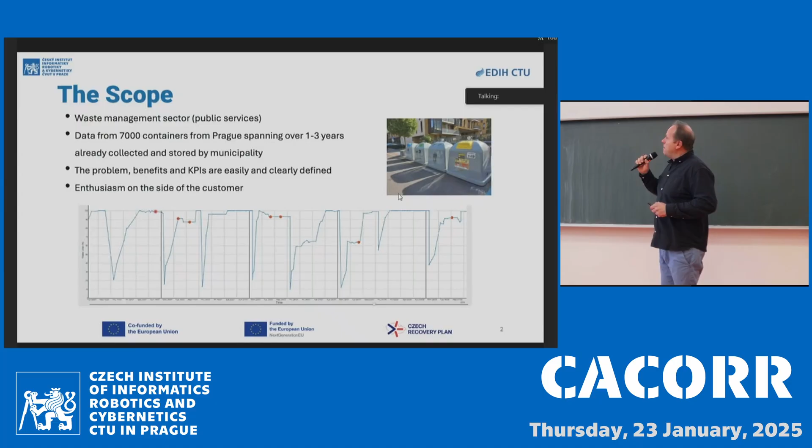The main objective is to make the waste collection more efficient. But to do that and to perform good decisions based on data, we need good data.

So in the middle, you can see data interpretation and cleaning. We have to make data more trustworthy and more correct, and interpret it to find different mistakes and errors. This is probably the most important part of the whole current project.

Here you can see what we can detect, what can be the problem. Here is the simplest case - detection of waste collections, which you can imagine is simple. But there is one false positive point, which is caused by an error of the sensor. And those errors are normal, it's not something very rare.

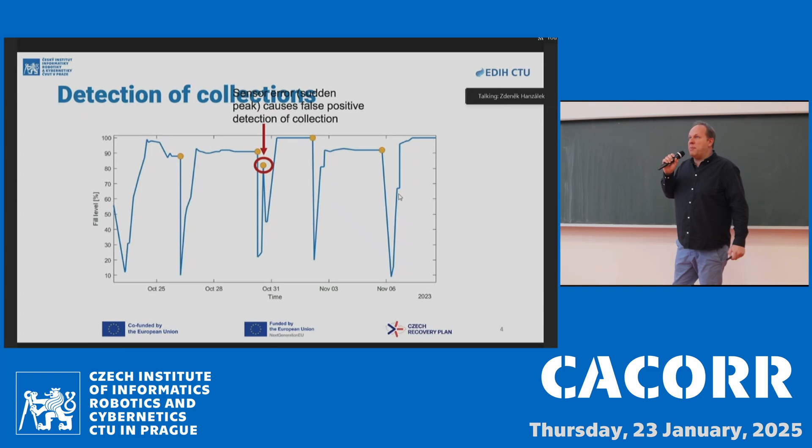This can lead to problematic decisions, like deciding there was an extra collection of the container, which is not true here. This is just one example, but there are many such examples and I don't have time for them.

Okay, here are some other things that we need to detect, and we are using heuristics, we are using also pattern classification, supervised learning. On the left side you can see, for example, stuck entry of the container, which can be a problem for citizens.

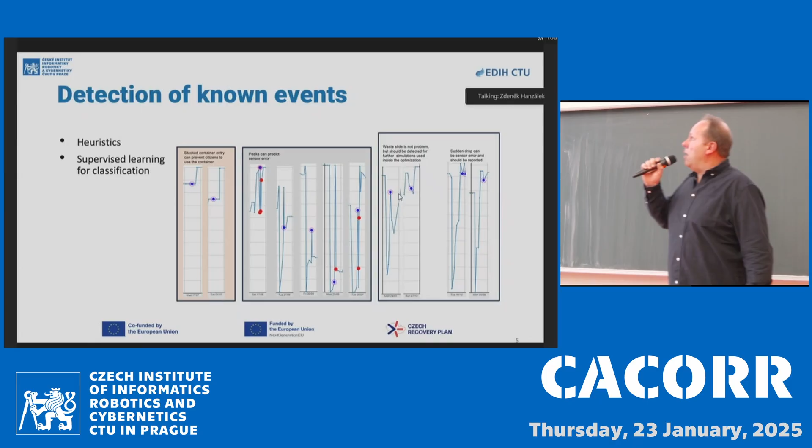In the middle you can see different peaks caused by error of the sensor. On the right hand side you can see a waste slide, which is normal, but we must differentiate it from sudden drop down, which are errors of sensors.

So those are just little examples of many things that we have to detect, and behind those, or except of those, we also need to detect some other abnormalities. So we are performing also anomaly detections.

Here is a very simple example from a method well known from industry, Six Sigma anomaly detection, where we have a mean weekly profile, and we have some standard deviations, and we define a range of plus minus 3 sigma, 3 standard deviations.

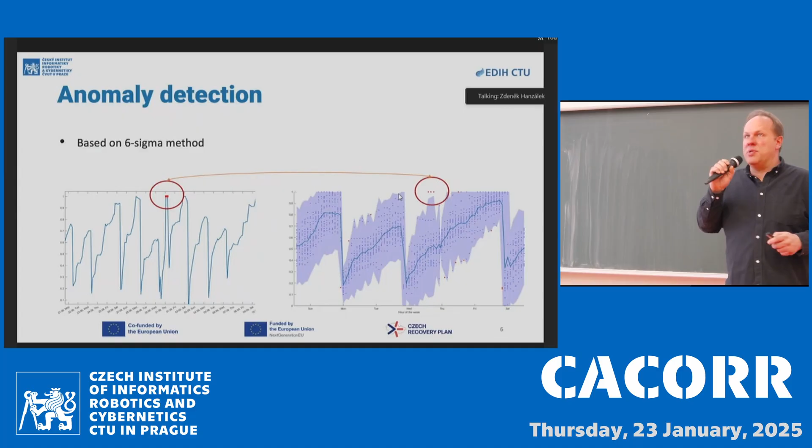And if some point exceeds this range, then it can be anomaly. Here is probably an anomaly caused by the first school day, but we also tried to test different other methods.

The best performing method at this moment is based on an autoregressive model with exogenous variables, where the exogenous variable is the collection signal, a binary signal, where we threshold the error of the forecast of this model, but we also use autoencoders and threshold the reconstruction error of that.

And we apply and test many of those things to choose one of those for further integration into a Golemio system, which is the Prague platform.

Okay, here you can see how we are trying to simulate what will happen if we change the schedule of collections. This is very simplified, by the way, but we have the clean signal at the beginning.

We can compute its difference, and then we can remove the collections, and then this represents the deposit of the waste in every hour, and we can use it by cumulative sum together with the new collection schedule.

We can use it to simulate the new schedule, the new fill level behavior, and we can use it in an optimization loop to optimize some criteria.

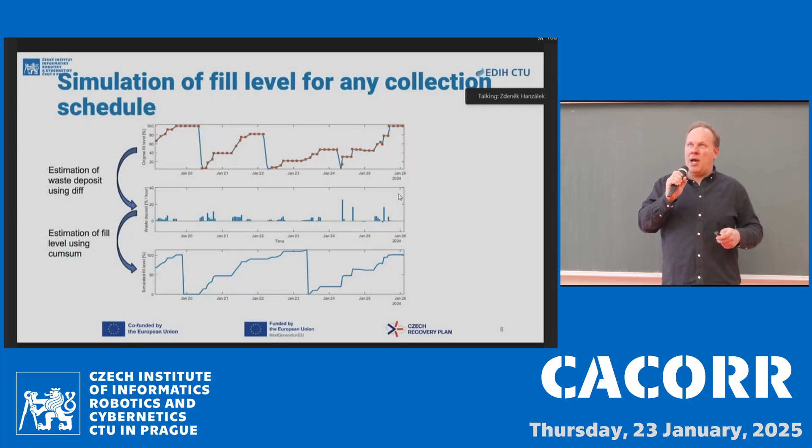An example is here. You can see that we can also simulate how much of the waste will not be deposited into the container because the container is full. It's the green part where we can measure the missed capacity and overflow.

And we can also measure how often and how much the container was collected without being full, which means that we underuse its capacity and we waste fuel for collections, or CO2 and so on.

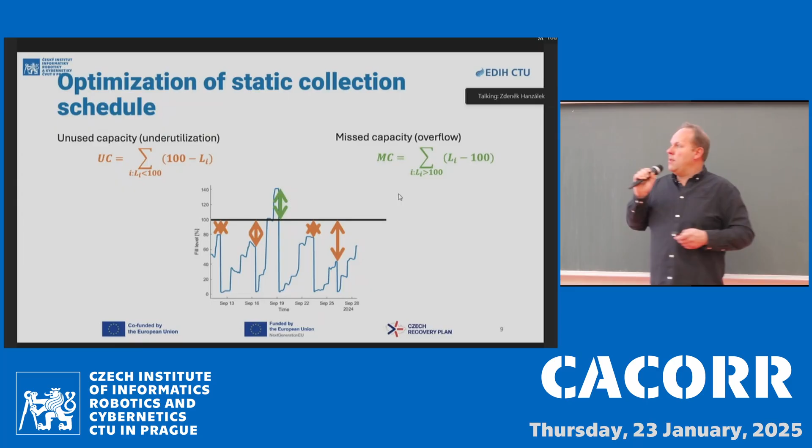Both those criteria are in trade-off, but both have some ecological gains. It means on the left side we save fuel and reduce CO2. On the right hand side we reduce the pollution of the neighborhood of the containers, for example.

We have some KPIs which I will not go into the details, but first are the data cleaning KPIs, where we are able to automatically analyze the signals instead of manual analysis by expert.

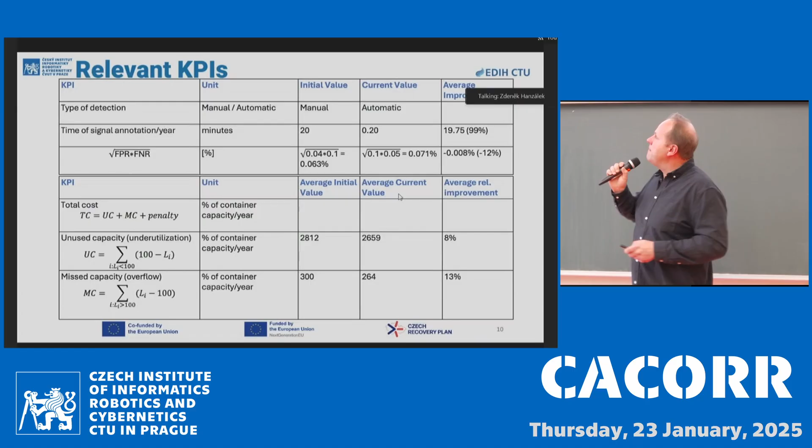There are also optimization KPIs where we are able at this moment to reduce those criteria by 10%. This is measured on 100 containers, and there are many other benefits which you should see here.

Also, for example, I must point out the networking, because it enables better communication between the municipality and the other stakeholders like citizens, but also a collection company or sensor providers.

And we had to develop an application which will not be used finally, but it's used for enabling communication and getting feedback from the customer, which can give us feedback about the methods, but also user experience, but also we can use it for...

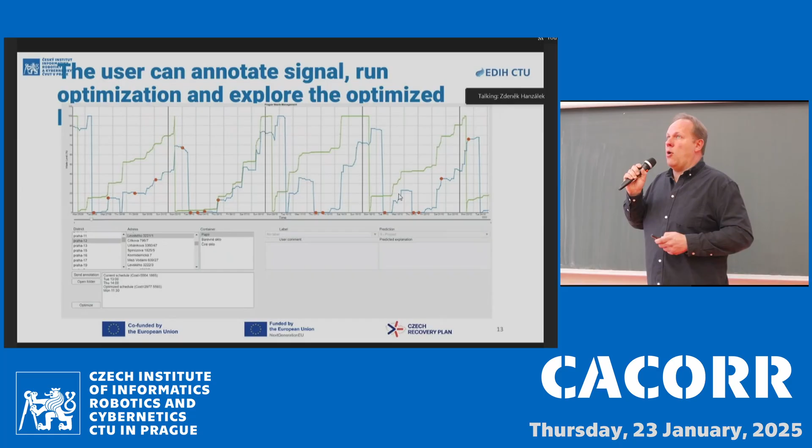Evaluating the methods in terms of comparison of our predictions to what really happened, the real annotations. And those are examples. The user can optimize methods, can go through the signal, can optimize the schedule of collection, can annotate data, and can observe the automated annotations.

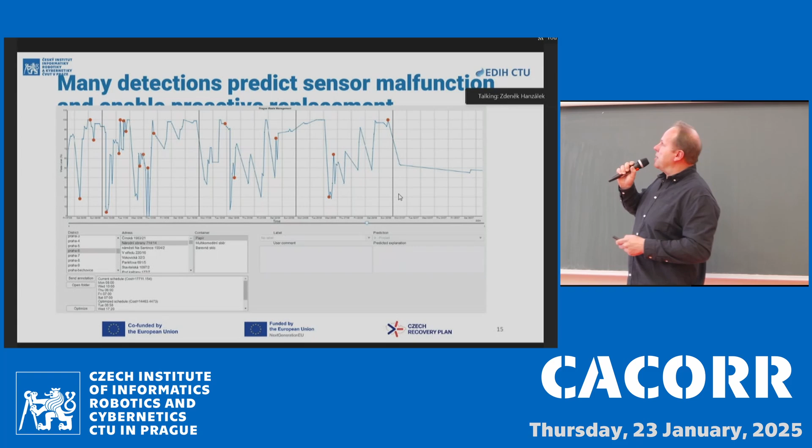So, okay, hello everyone. It's my pleasure to introduce or give you an overview about our project, contractual research with Škoda Auto company, and the project was about the weights of the special car equipment.

So, first, some background to understand the entities from the next slides. Most of us have a car, and most of them, for example, me as well, have a car from the Volkswagen concern, and maybe you can find in your car, in a service book or on the tank cover, you can find the car specification.

It is composed of approximately 200 families of PR numbers. PR number represents production order number, production or product specification, or part specification. For example, GOC represents a 5-speed manual transmission.

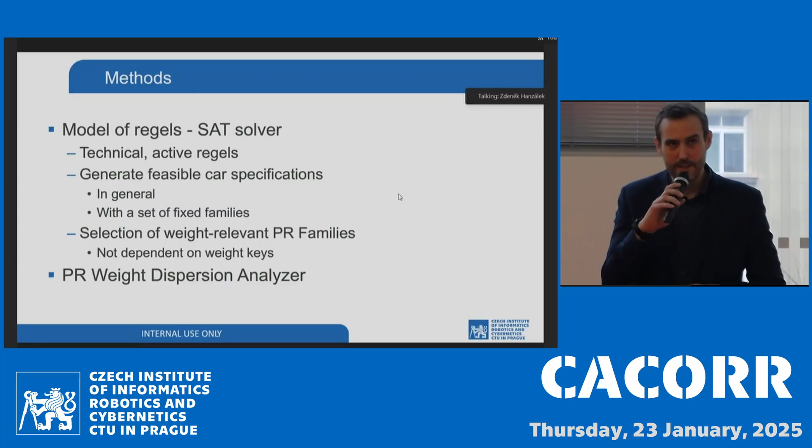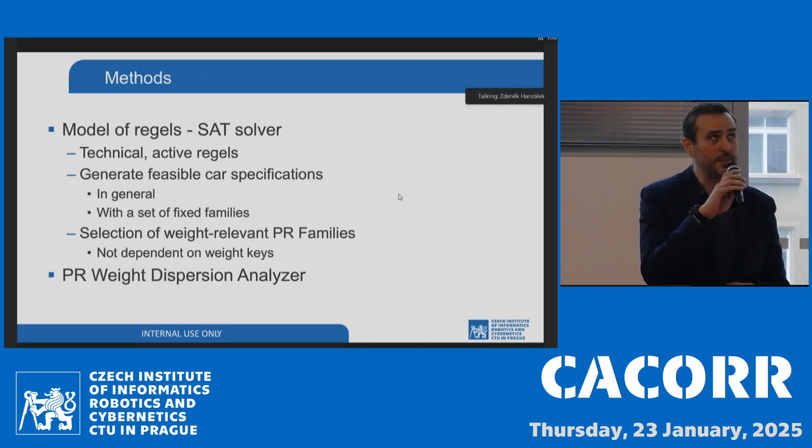Active rules—like if you have a car produced for Sweden, you have to have a battery with a bigger capacity, etc. For one car, there are around 12,000 rules which specify or limit the given production, and we use a SAT solver to generate feasible car specifications and also select what they call in Škoda Auto weight-relevant PR families.

I've already mentioned that the car is specified by the weight key, and with the help of the rules, for example 40 to 80 other families are dependent on the weight key, and the rest is what's important for this project, or as input for us.

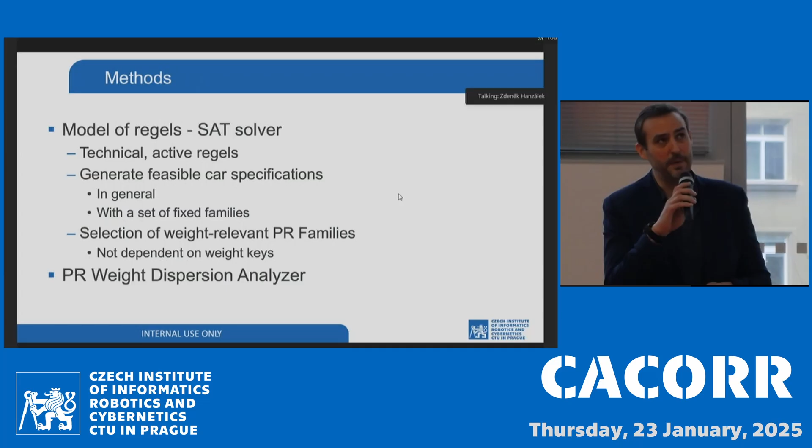Next, we implemented something we call the weight dispersion analyzer, and I'll give you an overview of the main steps. First, we generate a set of PR numbers from weight-relevant families.

Next, we prune the solution space using a database—bill of material database in English, I hope. And next, we investigate these pairs from a family to get a weight contribution.

The next step is to generate identical feasible combinations of PR numbers—the car specification for the pairs from the previous step. The outcome becomes better with an increasing number of such car specification pairs for the pair of PR numbers.

Next, we compute the weight of the overall car, and then the weight difference between these two cars with the same specification but just a difference in the given pair of PR numbers.

We have the weight contribution, and in this step we generate 10,000 such pairs of car specifications for every pair, and at the end you can see the dispersion of the weight contribution, which is shown here in the figure.

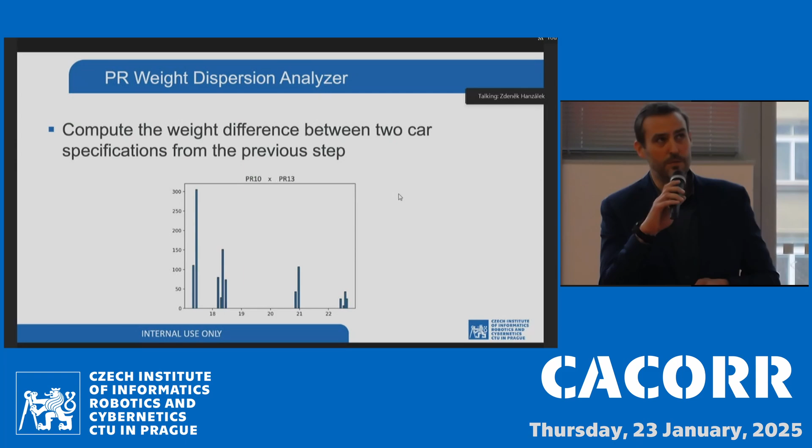There are some limitations: if the dispersion is bigger than some threshold, you have to specify or improve the dispersion using an additional PR number from a different family. In this step, we go through all of the other families to find the suitable one which provides the smallest dispersion.

To conclude, the solution was not limited just by the target, but also by the processes in the companies and the systems and software which are available.

This means the outcome was, for example, an Excel sheet with a specific number of lines showing the most important contributions of PR numbers, because this contribution of PR numbers is manually added to another system, etc.

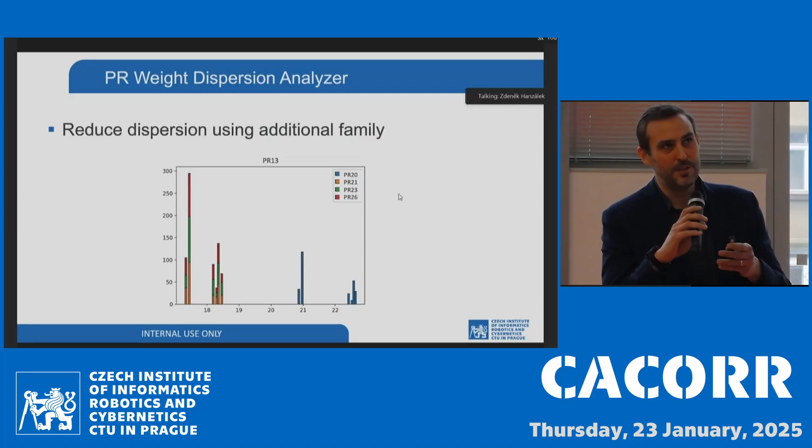I would like to present my first publication at the IEEE INDIN conference last year. The title of my publication is Product Digital Twin Supporting End-of-Life Phase of Electric Vehicle Batteries Utilizing Product Process Resource Asset Network.

The motivation of our work is something we encountered ourselves when we wanted to create a disassembly process for EV batteries. The problem is lack of support from manufacturers for end-of-life processes.

To address this problem, we proposed a product digital twin, which for us is a digital replica of a physical product—in our use case, an EV battery. This digital twin accompanies the product from initial design to recycling or reuse, offering insight for each product based on its condition and usage history. So this digital twin offers lifecycle management for a product.

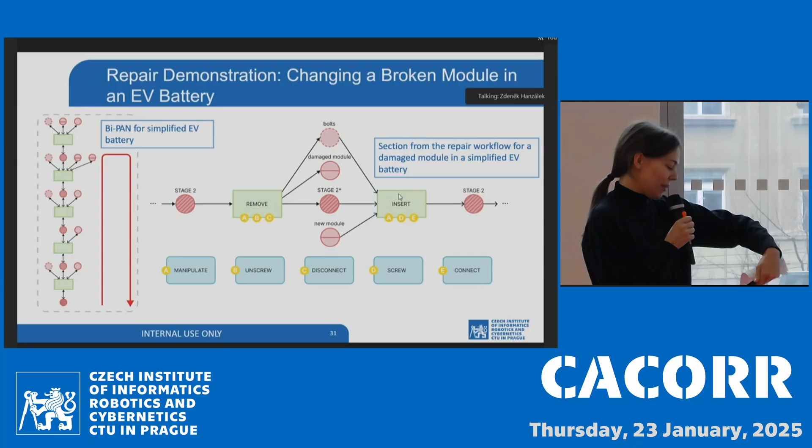To sum up, the Bi-PAN-based digital twin for products provides efficient planning for several operations during the whole life cycle of a product. Thank you.

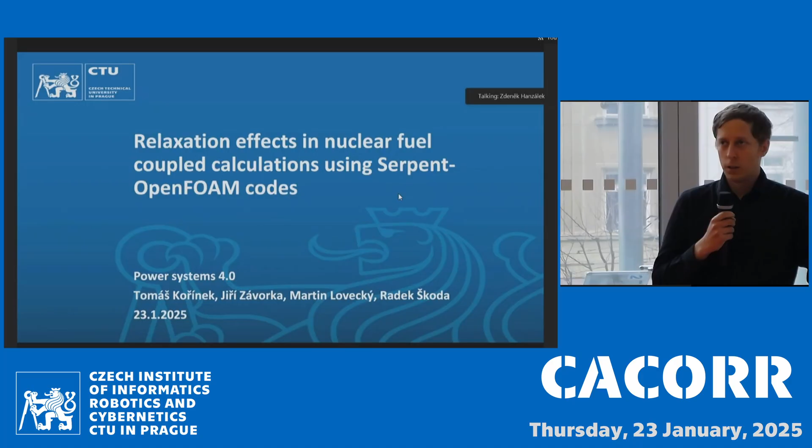Hello everybody, my name is Kořínek, and I'm from the group of Professor Škoda. I'm going to present one of the results of our research, which was focused on multiphysics problems in nuclear reactors.

This is something we are doing under a project within the National Center of Competence—the Center for Advanced Nuclear Technologies. We have a sub-project focusing on high-fidelity simulations using coupled codes, which we use for validation of macro codes, where macro codes are nowadays used for safety analysis of nuclear reactors.

This work was published in one of the top journals, Progress in Nuclear Energy, which I call a swing journal because sometimes it's D1, sometimes Q1—nobody knows—but it's one of the best we can publish there.

In this case, we did some multiphysics work, meaning we coupled two problems: neutronic physics with thermal hydraulics. There are several reasons you need to couple them, because there are feedbacks or strong interactions between each other.

So what does it mean? Basically, what is going on with fission and nuclear physics is influenced by the results we obtain from the thermohydraulics. This means fission is influenced by temperature, density of the coolant, fuel, and so on. Because of this strong feedback, you can encounter problems with stability of the calculations.

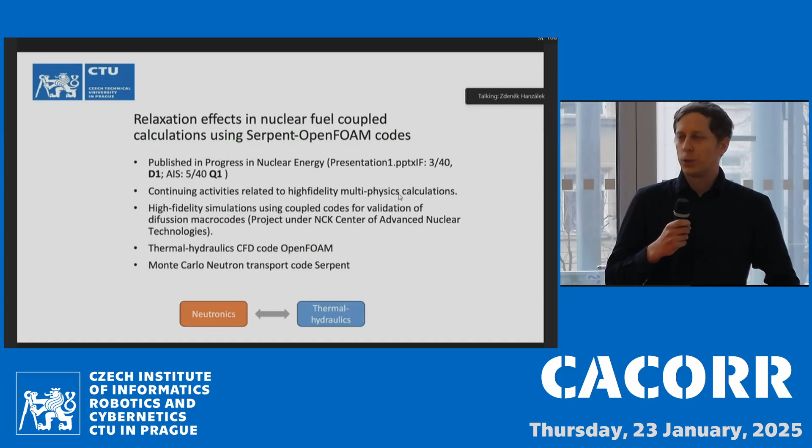That's why we focused on relaxations of those calculations and examined the influence on computational cost and accuracy of the simulations. So why do we care about focusing on computational cost and accuracy?

For example, in a nuclear reactor core, if we speak about the reactor we have in Dukovany, you have more than 300 fuel assemblies. Each fuel assembly contains 126 fuel rods, and fuel rods are composed of a fuel pellet and cladding, which encapsulates the fuel, surrounded by the coolant. So it means that in the reactor you have something around 40,000 fuel rods you have to calculate. For Monte Carlo simulations, you need a lot of particles to simulate it, especially with 40,000 fuel rods.

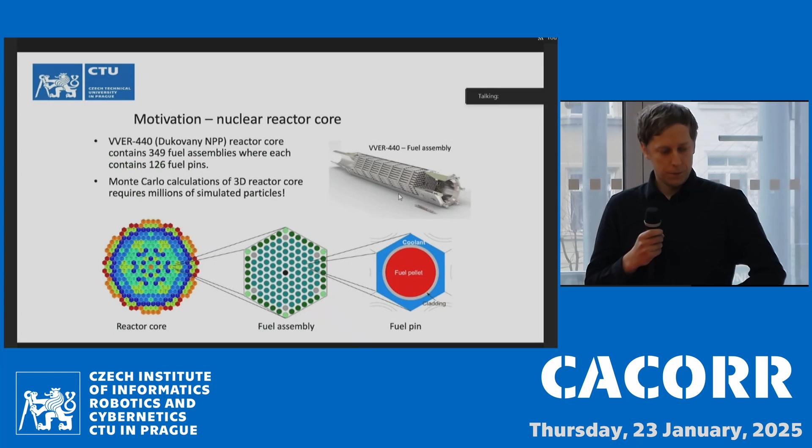So in our case, we took a look at a simple problem. We took one of the fuel rods, which was surrounded by the coolant, and we performed coupled calculations using the high fidelity code. For thermohydraulics it was CFD, and for the neutronics part it was Monte Carlo.

And we took a look at the relaxation. As I said, there are a lot of strong feedbacks. So when you start without any relaxation, you basically never converge because there will be oscillations in the solutions. So in this case we focused on methods of relaxation. There are different methods: using a constant relaxation factor, a factor which changes during the iterations, and also an additional change when we increase the number of simulated particles, basically to save computational time.

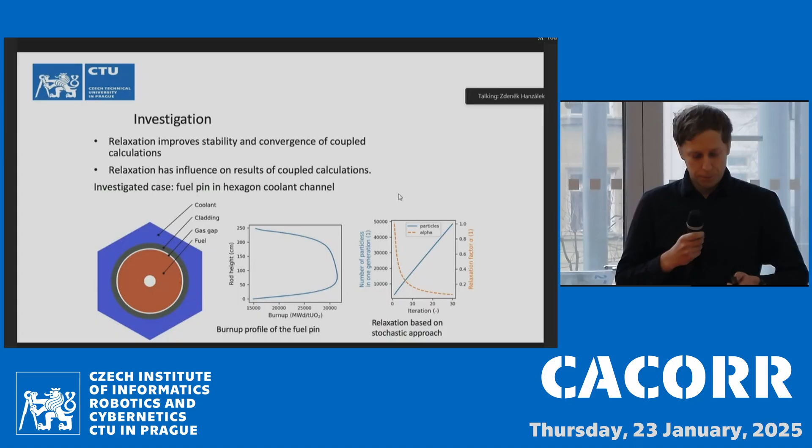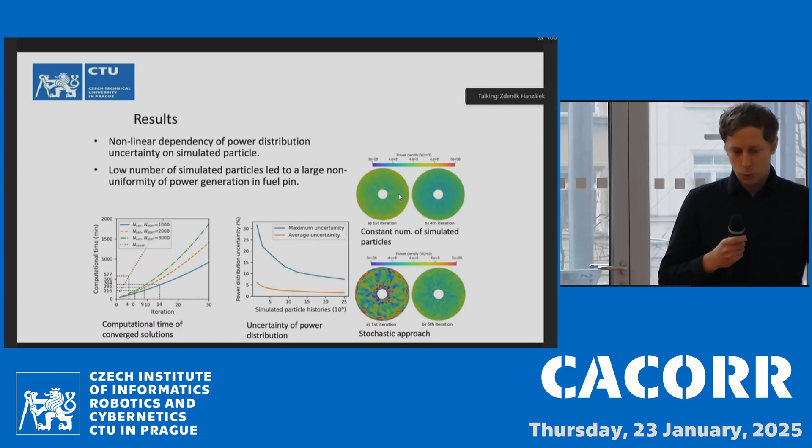So that's all from my side. Thank you. Thank you.

My name is Mamula. I'm head of the energy group under Professor Mařík. And I will present you a success - we call it a success story - of research and development in our department.

Last year on this spot, I presented that we had developed an algorithm which would be implemented in a real application. Since then, the time passed through the winter, early summer, into the summer, and then maybe in June or July, you might have read some articles about the go-live of the power plant, with several official starts and conferences presenting that the investor achieved this goal, and the power plant was put into operation.

What was the timeline of the project? We met with the investors approximately in 2019 and started to think about their concept. We provided them with the initial feasibility study.

We provided insight on whether one big engine or more small engines were feasible for their idea of provision of ancillary services, and we finally came to the solution of 6 small engines and a battery system, which seemed ideal. Then there was an unpaid time while the idea was growing.

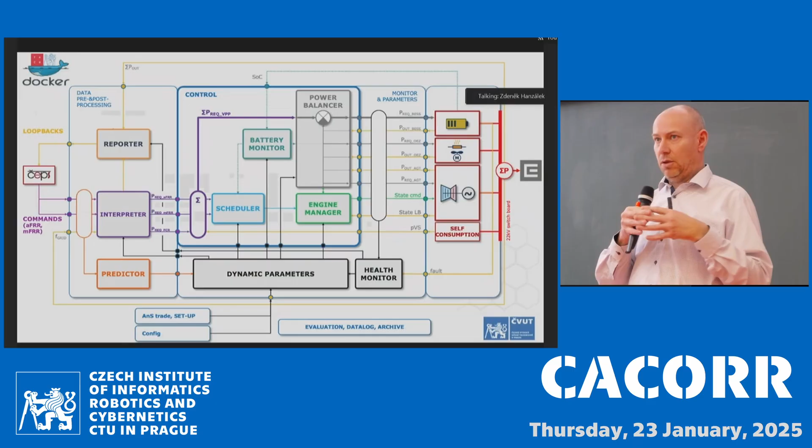In terms of money, I'll get back to the timeline. The implementation was supported by a contract worth 3 million crowns. Now we are negotiating a follow-up contract for enhancing the services for another 1.5 million crowns, and other features on the table might be worth 2 or 2.5 million crowns within year 2025.

So I think this is a really big success of R&D implemented into real operation. If there is spare time, instead of a digital twin, I can show you the real operation of the power plant. Let me try to connect.

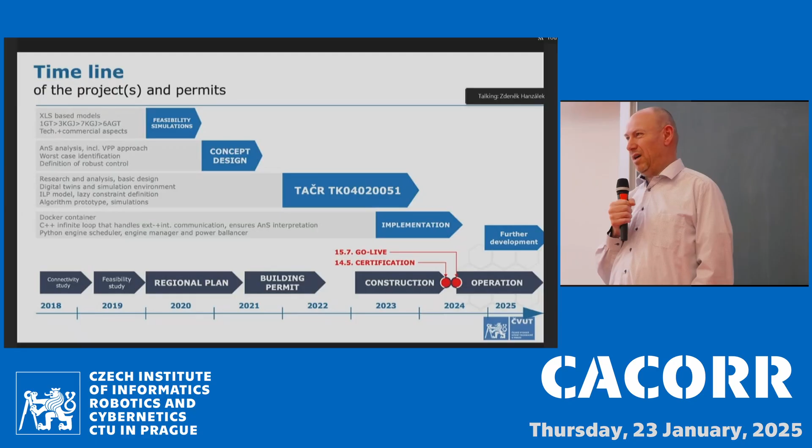If the algorithm worked badly, we might lose 2.5 million, because the penalty is approximately the same size as the revenue if the power plant doesn't work well. So this is the business we are working in. It's really tough and sometimes exhausting, but I think we are proud that the algorithm has been working for most of half a year without any malfunction.

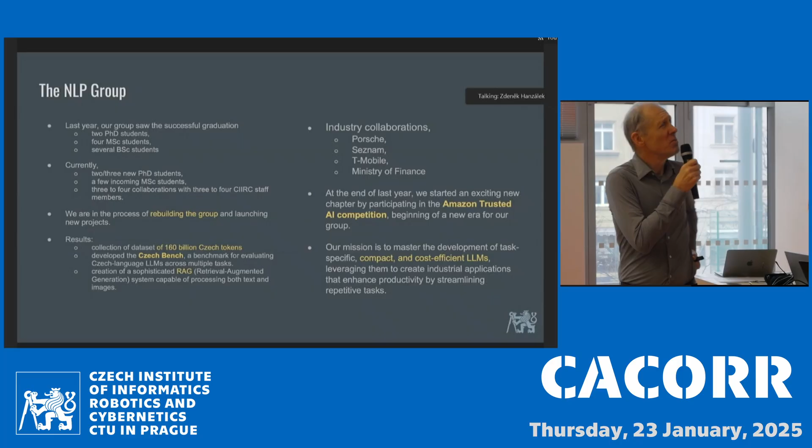Just to complete this page, I just skipped the partners we work for or worked for in the last year. As you can see, we had several business partners, starting with Porsche, Seznam, T-Mobile, and currently we work for the Ministry of Finance. All this cooperation with these industrial partners is thanks to what we have done in research.

What we deliver to these companies is basically what we started to work on two years ago. So currently the Ministry of Finance project is a retrieval augmented generation system using several algorithms which have been partly developed here at CIIRC, and the combination of these algorithms, or the whole architecture, was fully developed here. We are now in the phase of deploying it and testing it.

But let's go back to what we will do - the Amazon Trusted AI. As I explained, the basic idea is to generate non-malicious code, and not only show the code but also explain how the code has been developed.